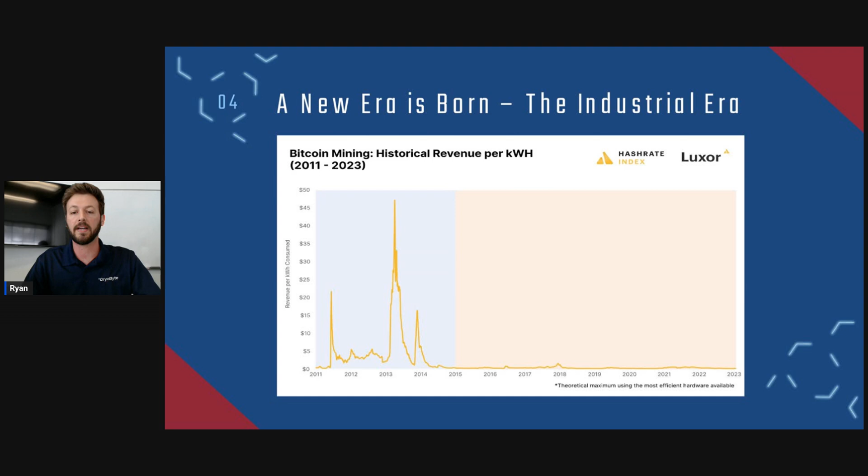It's a very competitive industry. You can't just take a miner anymore, plug it in, and print money. You have to find a lot of cheap power. You have to have a lot of advanced equipment. So it's very competitive, and my belief is it's going to continue to get even more competitive.

A clear strategy emerged with this industrial era, and I like to describe it as an energy arbitrage. It's not technically an arbitrage, but it's easy to follow. An arbitrage is when you take something of low value over here and you instantly sell it for a higher value over here, and your profit is that margin in between.

And this is the strategy that most Bitcoin miners use. You access cheap power, you scale, and you put hash rate behind that power. And the third step, everybody's favorite, you profit from it. And it's that profit in between your cheap power and the Bitcoin that you're producing. That's sort of your energy arbitrage.

Now, there's a lot of evidence of this energy arbitrage across the industry. So in order to drive better profit margins and in order to stay in business, you really need cheap power. So we see that all over the place. We see these large industrial miners accessing low cost and large power purchase agreements, so locking in cheap power for a long time. You see miners creatively going after stranded energy, so energy that was not monetized before, like flare gas and different biomass solutions.

That's geographically isolated. You now can load up a bunch of miners in a container, ship them out to a flare gas site, and as long as you have an internet connection, you can harness that very cheap power to mine efficiently. And then there's also excess energy, so hydro, solar, wind, all these renewables. They're constantly creating energy even if there's not demand for it. And Bitcoin miners are acting as a buyer of last resort, and they're able to harness that excess energy and mine profitably.

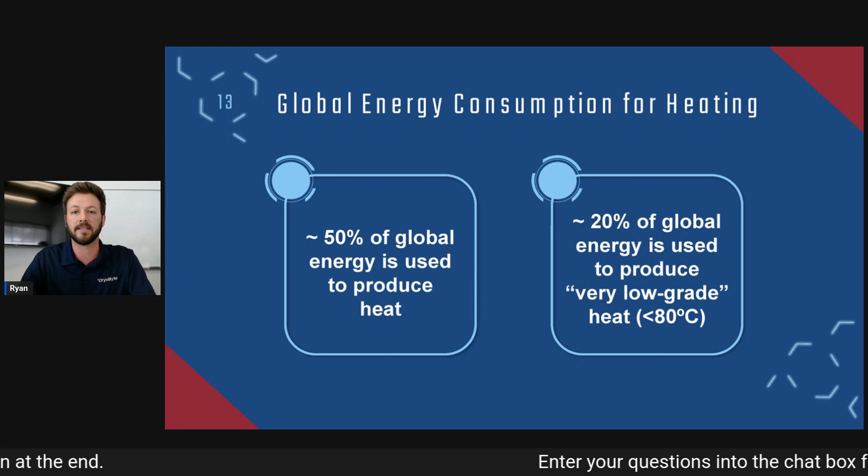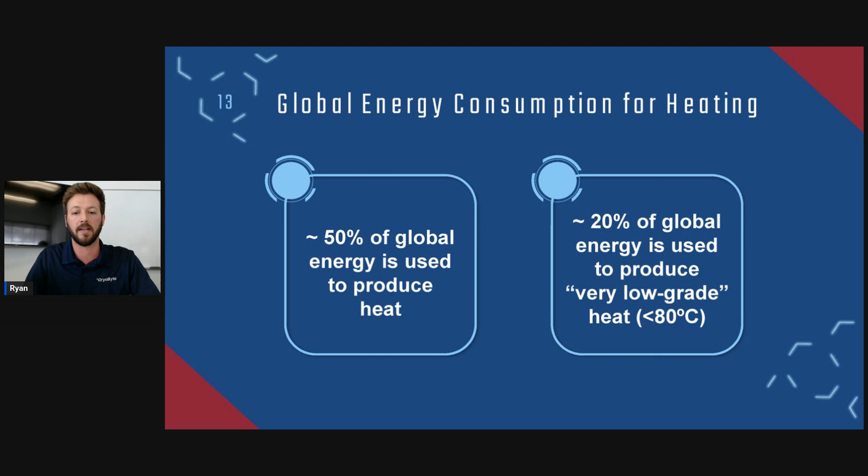But actually 20% of the global energy production is used to produce very low grade heat. This is heat that is less than 80 degrees Celsius. And that number is important because that 80 degrees is now achievable by Bitcoin mining. So another way to view this is 20% of all the energy used in the world produces heat that could theoretically be produced by Bitcoin miners as a waste product. There's a lot of opportunity there to reuse heat.

Here are some of the use cases for that very low grade heat. So residential space heating is the biggest one. 7.5% of all the world's energy goes in just to keeping houses warm, just to keep you warm at night, setting your thermostat at 70 degrees in the wintertime or whatnot. Commercial space heating, the same thing. Heating your water, being able to take a warm shower, uses 3.75% of all the world's energy.

And you go down the line with food and beverage manufacturing, pulp and paper industry, greenhouses, which people are using Bitcoin miners to heat, uses 0.75% of the world's global energy. Crop drying and agricultural use. My uncle is actually a farmer, and every year he has to dry out his grain. When he puts the beans or corn in the silo, he has to remove the moisture from them in order to keep them from spoiling and going bad.

And he has to get within a certain percentage or else he gets docked when he sells the grain. But he knows going in every single year, this is going to be a business expense. He's expecting to pay for that heat, and he needs a ton of that heat in order to dry out his crops. So if you look at all these use cases, there's a lot of different areas where Bitcoin heat could be repurposed in order to save energy that we're already spending.

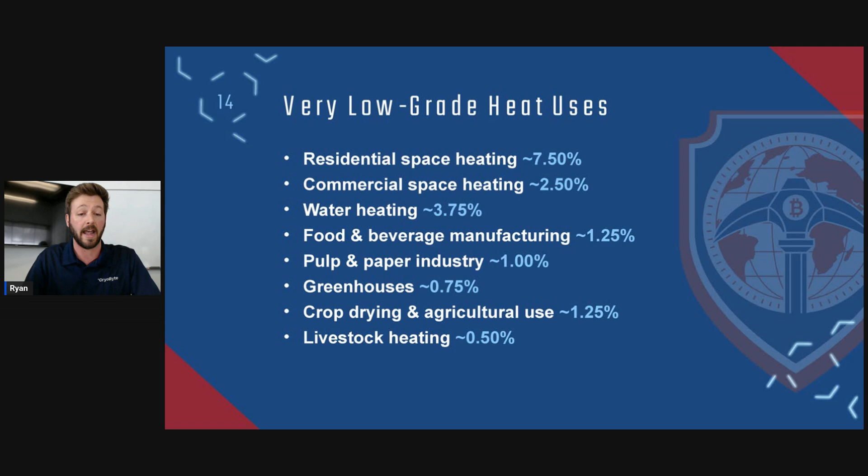If you compare that to the global Bitcoin network, assuming an 800 exahash network, we're a little bit above that, an efficiency of 25 joules per terahash, and the very low grade heat constant power consumption of 2.5 terawatts, which is just a flattened curve of average production. If we replace just 1% of very low grade heat, we could more than double the Bitcoin network. And that is crazy. So replacing just 1% of that heat would more than double the Bitcoin network based on the power consumption that we use to create that heat.

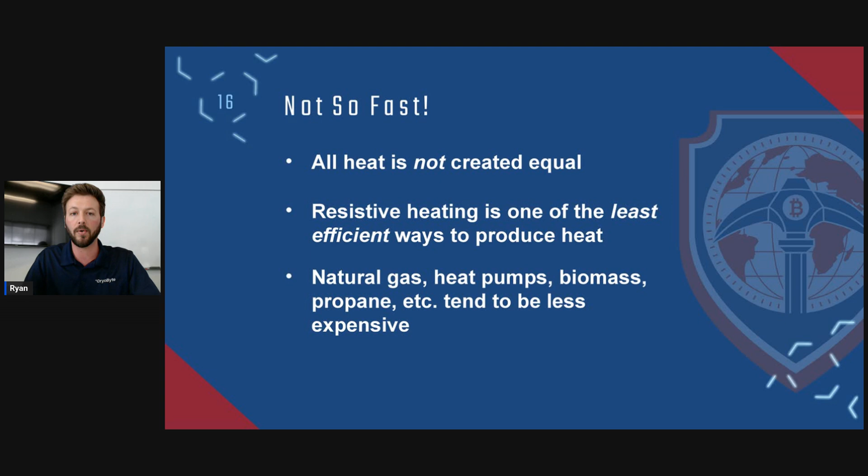Now, as people are saying, I think somebody just commented actually, it depends on the original energy source and conversion efficiency. That's correct. So not so fast. All heat is not created equal. And that's why we wanted to point out at the very beginning how your Bitcoin miner produces heat. It's a resistive heater. And it actually is one of the least efficient ways to produce that heat. That's why we use things like natural gas and heat pumps, biomass, things like that. We don't have space heaters all around our house because we would be paying 3 or 4 times more to heat our home than using natural gas or a heat pump. So it's important to know that.

Here's a general breakdown, and this is very ballpark, very relative, or in general. So don't take this as gospel. This is more just as a guideline. If you were to create heat using different heating methods, this is the relative percentage cost compared to electric resistive heating. So if I were to use heating oil like some old homes do, I could expect to pay 70 to 90% of what I would be paying to create electric resistive heating. Propane, 60 to 80, you can go down that list.

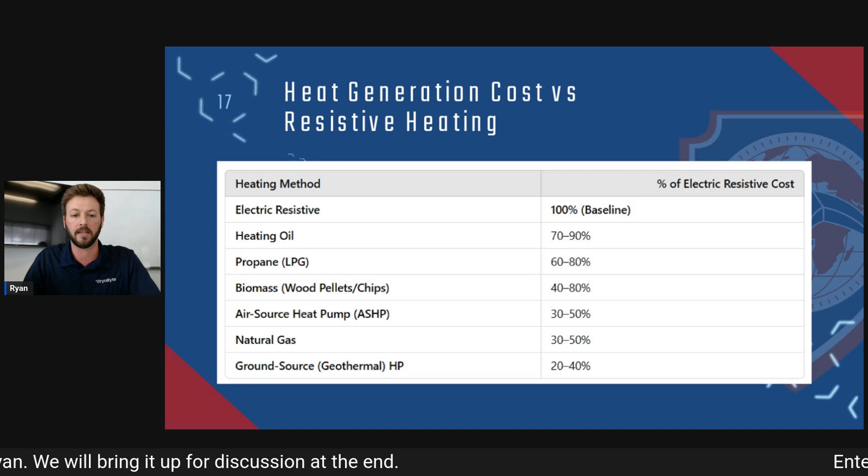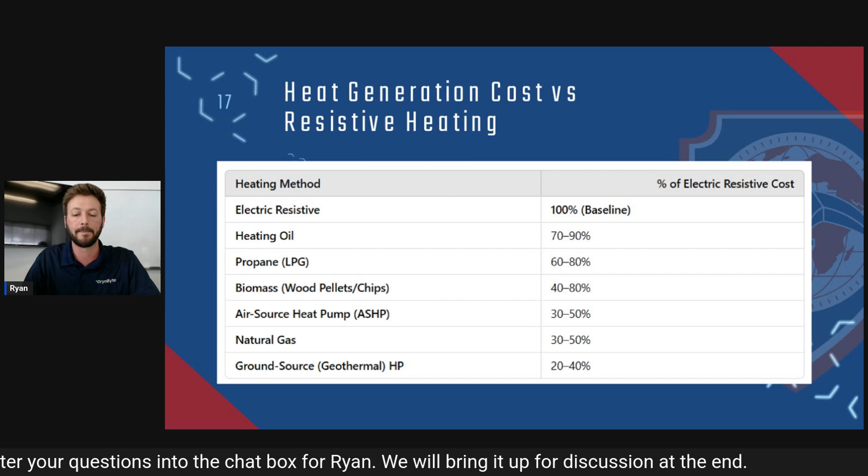If you look at the heat pumps and natural gas, you can see here that running a heat pump or using natural gas to provide heat is usually about 3 to 4 times less expensive than it would be to create that heat using electric resistive heating, aka Bitcoin mining. So you're able to produce heat much more efficiently using different methods. But there's still massive opportunity here, and this is the concept.

There are 2 reasons. So the first is that with Bitcoin mining, you are producing 2 products with 1 energy input. So all those other methods that I just showed you, none of those produce anything of value other than the heat itself. They're not paying you to produce that heat. But with Bitcoin mining, you're producing Bitcoin and you're producing that heat. So if the sum economically of your Bitcoin and your heat production are higher than the inefficiency of producing that heat, you're actually better off economically by producing heat via Bitcoin mining or electric resistive heating.

The second concept here is that heat consumers expect to have a loss. Again, when I'm heating my home, I know I'm going to have an energy bill every month, and I know I'm going to have to pay that, and I'm perfectly fine with that to keep my home warm. My uncle, the farmer, he knows that he's going to have to dry his grain out. He actually uses propane to do that because of his system he has set up there, and he knows that that's going to be a big expense every year to dry out that grain.

Now, this is nice because that means as a Bitcoin miner, in order to produce that heat, I actually don't need to mine for profit. I can actually mine at a loss. And again, as long as my total economic output from that heat and the Bitcoin itself are higher than what I would have paid for that heat, then I'm actually better off economically. So even though Bitcoin miners produce heat less efficiently than other methods, there are a lot of examples where the economic benefit is actually better because you get Bitcoin on the back end. So if we were to break this down, this again is general, just for you to get an idea of what your power rate could look like.

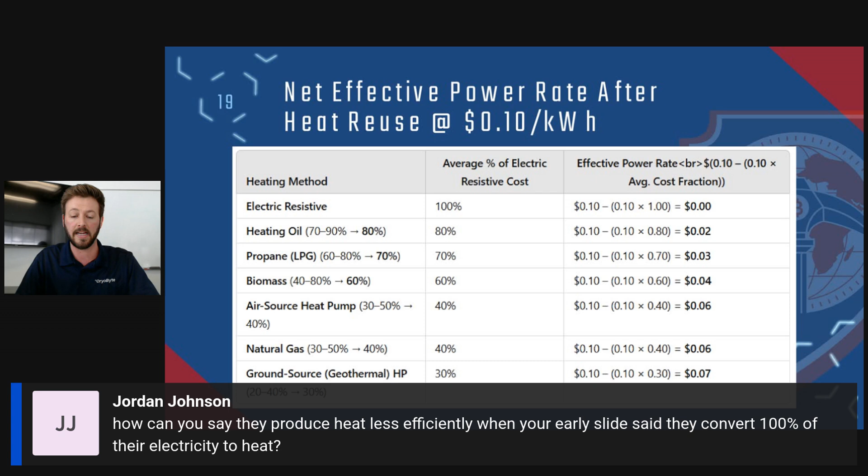So, quick question. Jordan has a question. How can you say they produce heat less efficiently when earlier you said they convert 100% of electricity to heat? That's a good question. With electric resistive heating, you're taking the electricity and you're converting all of that electricity into heat. But there's more efficient ways thermodynamically to create heat. So a heat pump doesn't create heat via electricity. It actually moves heat from cold to hot regions. So that's a good question.

It's kind of hard to think about, but the other ways to produce heat, they don't use electricity to do that. They might be plugged in. Your furnace is plugged in for blower motors and things like that, but it's actually igniting that propane, and the propane is what is creating the heat more efficiently than the electric. So hopefully that helps to answer your question.

But if we continue down this list here, if you were to replace, say, heating oil, some of the older homes still use heating oil. If you were to replace that cost, you would basically net 80% of the value of that heat, and you would effectively be mining at a 2 cent per kilowatt hour rate if you started at a 10 cent per kilowatt hour rate. And you can go down the line here. Propane gas is 3 cents per kilowatt hour. Biomass is 4 cents per kilowatt hour. And what you notice there is those are rates that industrial miners are even trying to get. 2 to 3 cents is maybe average for them, but electric resistive heating, if you're replacing that, you're mining at a zero cost. Your Bitcoin is basically free.

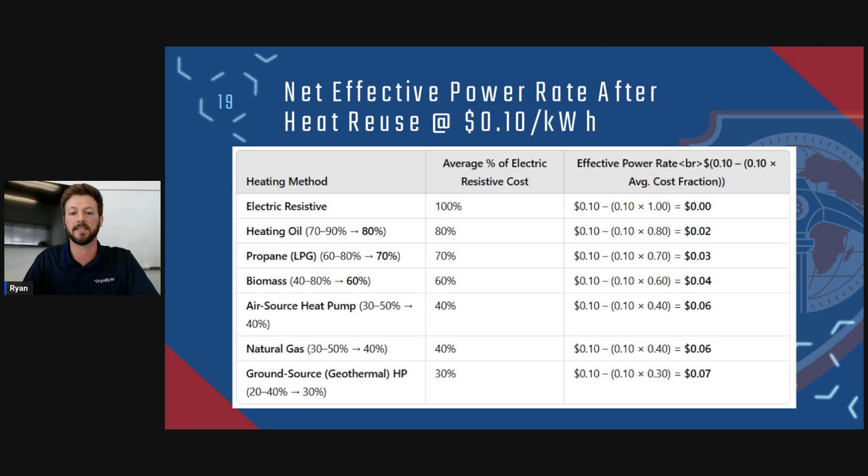That is an excellent way that small miners can stay competitive when these industrial miners are locking in electric rates at those prices. So even when you get down to natural gas and air source heat pumps and things like that, you're getting into the 6 and 7 cent range. That's still not a bad rate to mine at. That is similar to some hosting opportunities that you might see. So if you're on that borderline where maybe 10 cents wouldn't make sense for a mining operation, but if you can reuse some of that waste heat, it actually lowers your overall cost, and then it might push you into that profitability point. So this is just a general idea of how you can actually harness waste heat to help reduce your overall cost in mining.

But wait, there's more. So it's not just the cost of your electricity or the cost of you running that miner that would be affected. There's also symbiotic relationships between heat reuse and miner cooling. So oftentimes if your heat application is actually consuming that heat, you can, in a closed loop cycle, return cold water, return colder air, and it will actually help improve the cooling of your system. So you can reduce your cooling costs to your miner by 5, 10, 15% just by using a heat application that consumes that heat.

It's also environmentally friendly. Like we keep talking about, you're completing 2 tasks with 1 energy input. And if your economic benefit of those 2 tasks outweighs what it would cost you to complete 1 task individually, then you're actually consuming less overall energy. So instead of creating heat by itself and then mining Bitcoin by itself, if I do them together, I'm consuming less overall energy, which is better for the environment.

It helps decentralize the hash rate as well. So instead of having these giant hashing centralized entities, there's heat reuse needs all over the world geographically and in small little pockets. Like we saw, residential heating consumes a ton of global energy, and heating a house all over the world could help decentralize the hash rate and create a very healthy mix of industrial miners as well as smaller decentralized mining operations. It produces a much more resilient and less price sensitive network as well.

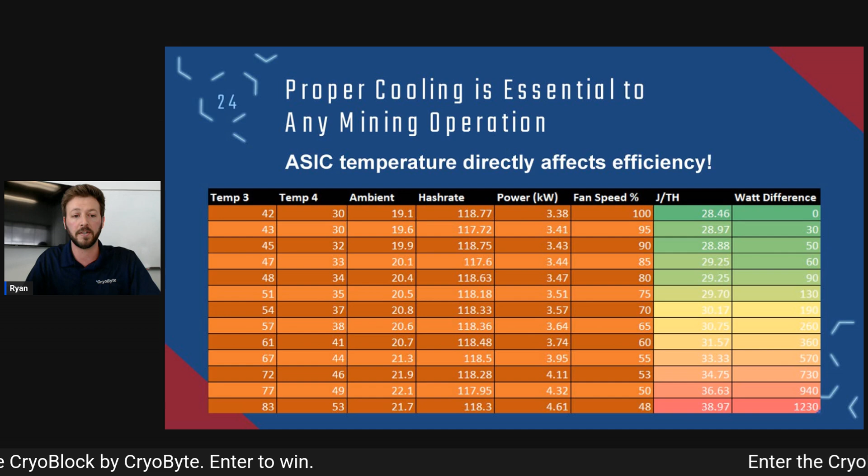As you can see here, once we start reaching 10 and 20 degrees, we start seeing efficiency drops of over 10%. So we're using 10% more energy to hash at the same hash settings simply because our ASICs are running at a hotter temperature. So cooling is extremely important to your overall efficiency. It's a good way to eke out 5 or 10% increases in efficiency just by keeping your miner running cool.

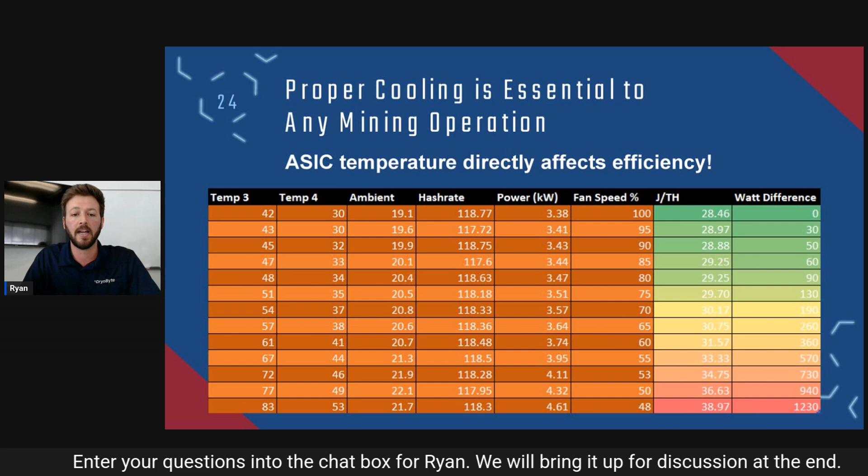And it's not just the cost savings that the temperature affects. So heat can cause thermal stress within your miner, and it can affect the miner lifespan. If you're running a miner very hot and heavy, not only are you mining inefficiently, but you're going to cause that miner most likely to fail faster. It's going to have a shorter lifespan than a miner that is well cooled.

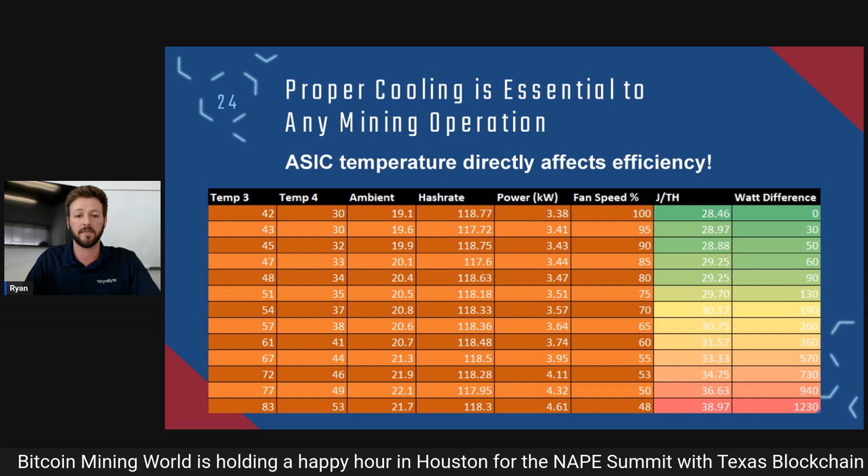So cooling is extremely important, not just for heat reuse applications, but also for mining in general. Even if you're running in one of those energy arbitrage industrial size facilities, you're going to want to pay close attention to how cool you can keep your machines.

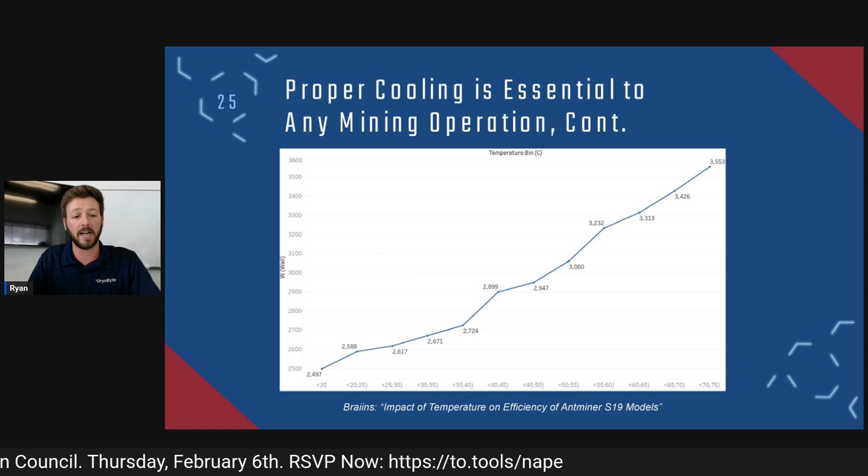We were not the first ones or the only ones to discover this. In fact, this is from Braiins, a popular firmware producer. They ran basically the same exact scenario and they had the same exact results. You can see here that just based on temperature, you can actually have a kilowatt more of energy use when your ASICs are running hotter. Now that's a wide temperature range, so that's probably not going to be that drastic in real life.

But if you're saving a few hundred watts of energy, you're mining 10% more efficiently, you're getting more hash rate, you're using less energy, you have more overhead in your mining facility to put more machines in, you're really maximizing all that energy to its full potential. So cooling is extremely essential.

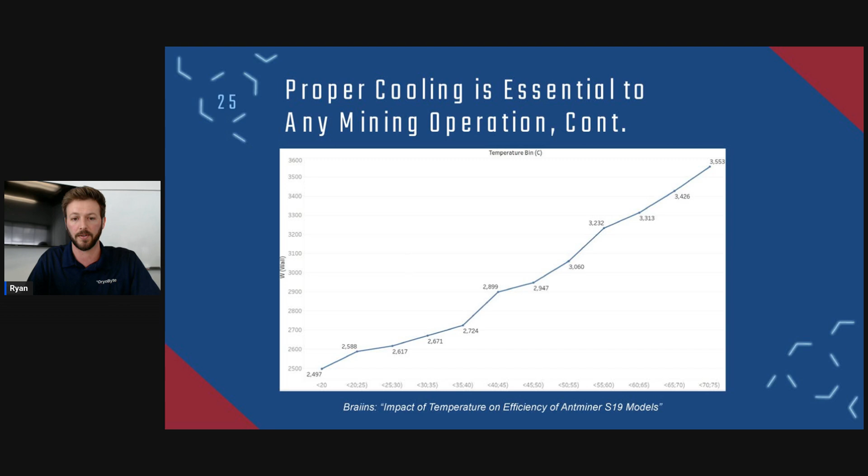Now the question we get asked a lot is, okay, if cooling is so essential, should I be using air cooling, immersion cooling, or hydro cooling? And the answer truly is it depends. There are so many factors that affect this question. So there's no right or wrong method. A lot of miners have cooling methods that they prefer.

So in general, though, what we found is that for smaller miners, if you were to use hydro or direct to chip, you actually tend to get the best cooling performance, which gives you the best overall efficiencies, especially when you account for cost. So there are some small miners that are getting into immersion mining, and there are a lot of benefits to immersion mining. But if you look at the overall efficiencies and the overall cost, for a lot of small miners, hydro is actually a better option.

Now, there are barriers to get into hydro, especially as a small miner. So hydro cooling tends to be focused on the large industrial miners. Hydro does such a good job at cooling your chips that you can actually densely pack a miner and consume a ton of energy in a very high hash rate by cooling with water. So you're creating these very power dense machines that consume a ton of power, and they need to run on 3-phase power.

And then you have to have complex cooling infrastructure. You have to have giant dry coolers if you're moving the heat outdoors. You have to have piping and all this stuff run. So it doesn't make sense for a heat reuse application. You know, I'm not going to put a data center in a greenhouse simply to reuse the heat. But if I want to mine efficiently, and if I want the other benefits of hydro cooling, it's really not attainable as a small miner.

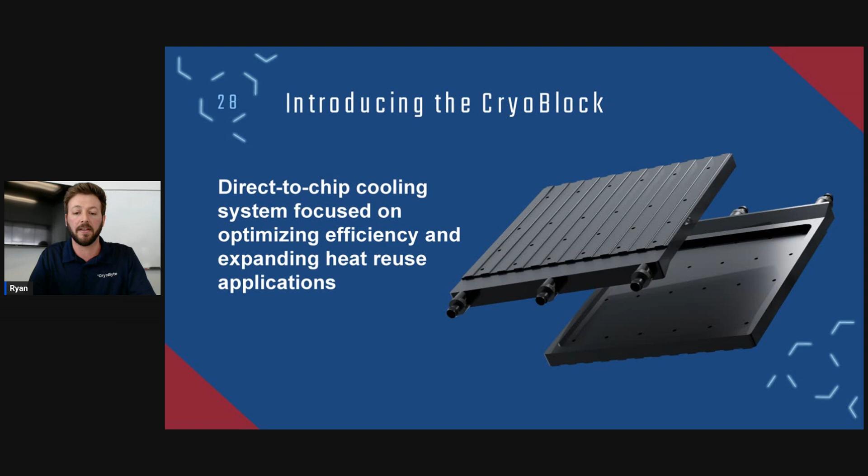Now, what we're pictured here are our cryo blocks. So the cryo block is actually the cold plate of the system. These are a patent pending design that allow you to cool your device much more efficiently. And those are part of an overall upgrade kit. So you can actually purchase an upgrade kit to upgrade an air-cooled miner. And those cryo blocks simply replace the heat sinks on your air-cooled miner.

So you unscrew the heat sinks, you put the cryo blocks on, and then you're able to circulate water or coolant through those blocks. You provide better cooling, you capture that heat from the ASIC chips via liquid, and it gives you the increases in efficiency, gives you increases in performance. You can actually overclock your miners by a crazy amount, where the PSU ends up being your top limit and your bottleneck and not so much the temperature.

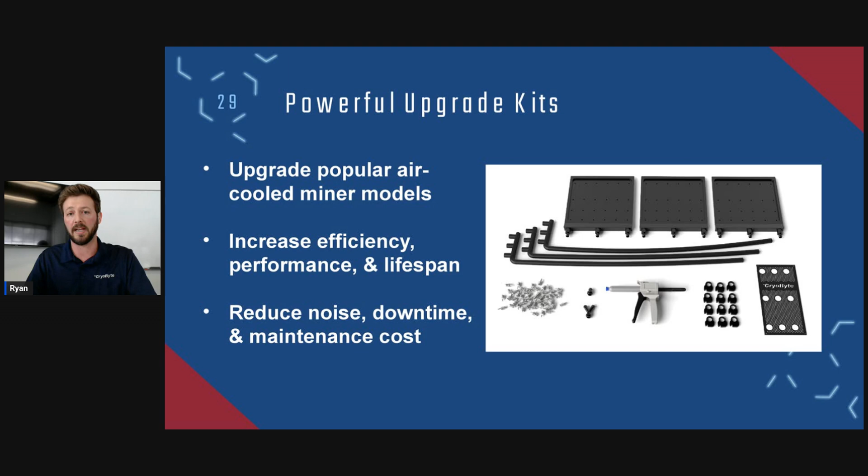And it also takes the thermal stress off of that miner, so you can actually increase the lifespan of that miner. You're also not pushing a ton of air through that miner anymore, so you don't have those loud cooling fans, so you reduce your noise. You reduce the downtime. You don't have all that dust accumulating internally there, so you reduce the maintenance cost as well. So there's a lot of benefits to upgrading an air-cooled miner to be a powerful hydro-cooled miner.

Now, it's also great for heat reuse. Like I've been saying, you can actually capture that heat from the ASIC chips in liquid. Liquid is much more efficient to move and to pump places. So if I wanted to move the heat outdoors, it's a lot easier for me and more efficient for me to pump it as a liquid than to try to pump it as air. Air does not move nearly as efficiently.

So I can actually expand my heat reuse by capturing in liquid too. I can then heat other liquid applications. So I could heat a swimming pool or a hot tub or a water heater. So you can use liquid to liquid plate heat exchangers that then allow you to expand your heat reuse applications.

One of my favorite benefits of upgrading a miner is the ability to have a flexible form factor. When you think about an air-cooled miner, you are forcing the air through the hash boards of your miner, and you really don't have any other option when it comes to air cooling. You just have to push through as much air as you can through that same form factor in order to cool your machine.

But when you actually capture that heat from inside your miner and you extract that heat, you then have the flexibility to exhaust that heat over any form factor that you want. So you can pump it outside to a dry cooler. You could use a nice little compact desktop radiator unit that actually can exhaust that heat. And that's exactly what we did in an experiment.

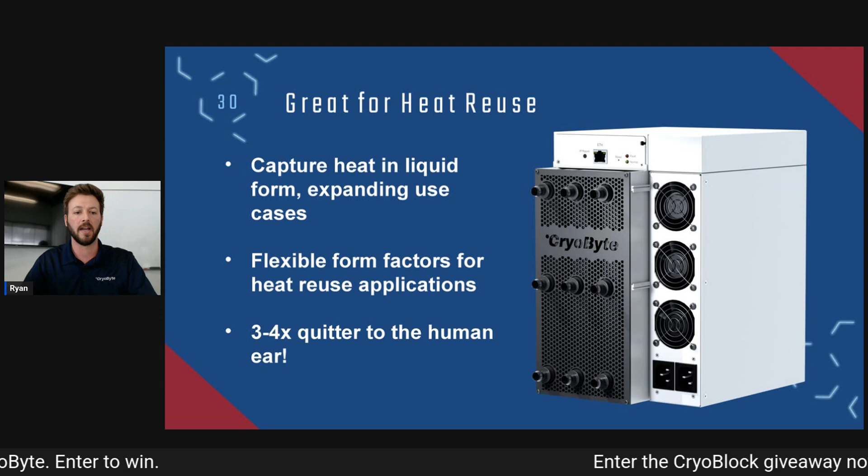But you don't want that noise, so you kind of have a dilemma. Do you want slower fans and less noise, or do you want better cooling with a very loud, annoying miner next to you? Well, with our hydro upgrade units, with these kits that we provide, you can actually get the best of both worlds. You can provide that same cooling. You can run at the same efficiencies or better efficiencies, while also reducing the noise. So you get the best of both worlds.

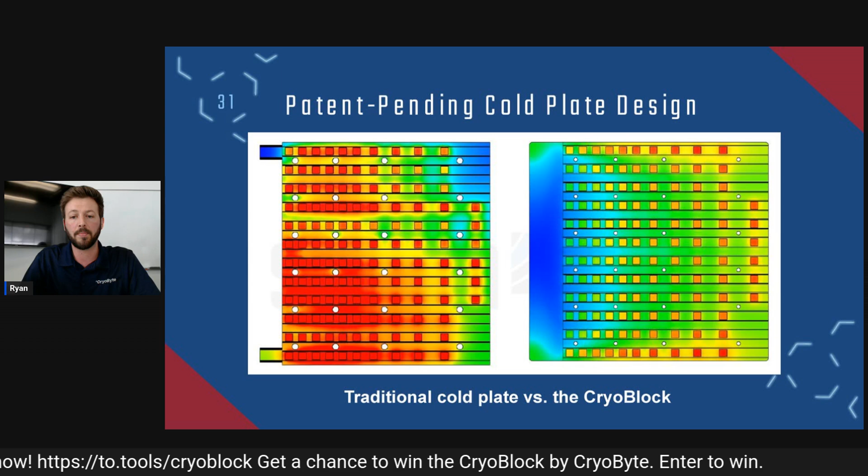Now, the power comes from our upgraded water blocks, those cryo blocks, as I called them before. So we packed a lot of technology into those. They just look like normal cooling blocks to most people, but internally, we've done a lot to improve heat dissipation. So we've been able to modify the flow of the coolant, and it flows in a much more efficient way to provide even cooling to all your chips.

Now, this is a CFD, a computational fluid dynamic analysis that we performed, comparing our cryo block on the right to a standard water block on the left. And as you can see, we have much better cooling. We eliminate a ton of hot spots. We're able to give a much more even, consistent temperature profile to all your ASIC chips.

In addition to optimized flow of coolant, we have internal microfin structures that allow you to dissipate heat much more efficiently. And what this means to you as a miner is you're going to get better cooling. You're going to have chips that run at lower temperatures. You're going to get higher efficiencies. You're going to get longer lifespan with your miner because you're providing it better cooling.

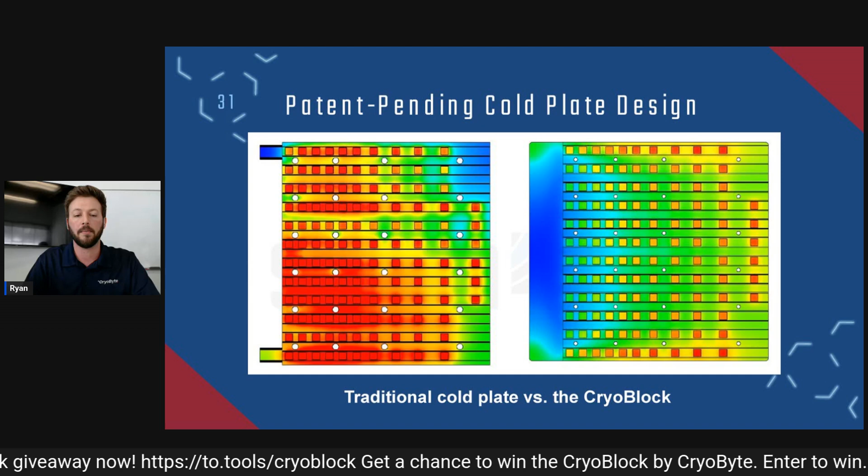So if you're in a high heat environment, even here where I'm located in Ohio, the temperature gets really hot in the summertime. In fact, we had a warehouse that we ran tests on where it was 104 degrees Fahrenheit in the summertime, peak of summer in July. We had a miner running in there. We had no ventilation, so no air moving in or out of this warehouse. And that miner was running with chip temperatures that were in the 60s at the highest temperatures. So running very efficiently, even in an extremely hot environment.

There's no thermal throttling, so you have higher uptimes. You're really reducing the thermal stress that your miner experiences. So there's a ton of opportunity for miners there in high heat environments.

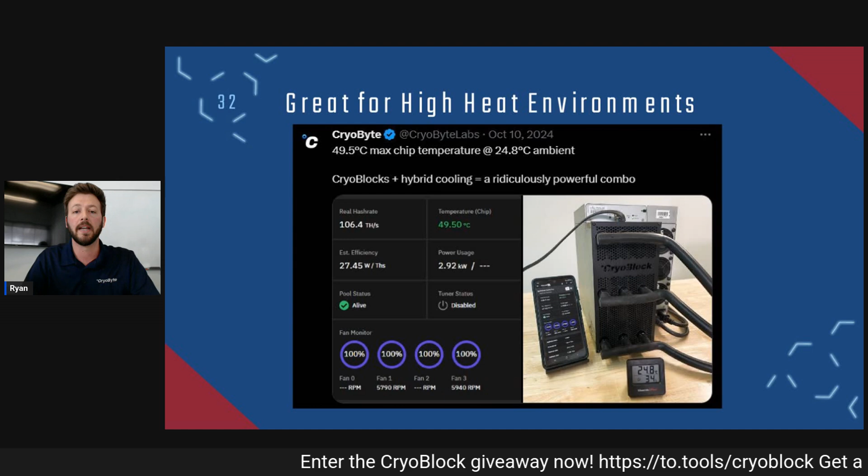Like I mentioned before, you can also overclock these things. When you overclock, you start raising your temperature quite quickly. And as we saw from all those previous studies and tests, that really decreases your mining efficiency. So as long as you're keeping your miner cool, you can actually perform these overclocks. You can overclock at a higher rate, and you can do so much more efficiently than just a standard air-cooled miner.

Thank you, Chad. Chad just said he can confirm that he burned up two out of 3 boards on an S21 overclocking with air cooled. And that's exactly right. Your chips are experiencing a lot of thermal stress. Even sometimes when they say they're in the appropriate limit, it's honestly like a silent killer. Everything can look fine, but if you're pushing those chips farther, they're going to end up getting burned out quicker. So as long as you are providing adequate cooling, especially via a cryo block, you're able to overclock those efficiently and safely.

So I know I'm just spitballing at you. I'm throwing a ton of information, but overall, if you want to run a more efficient mining operation, what I would beg you to do is look at your cooling, because cooling is a good way that you can eke out 5, 10, 15% increases in efficiency by increasing your miner's performance, the lifespan. You reduce the noise, the downtime.